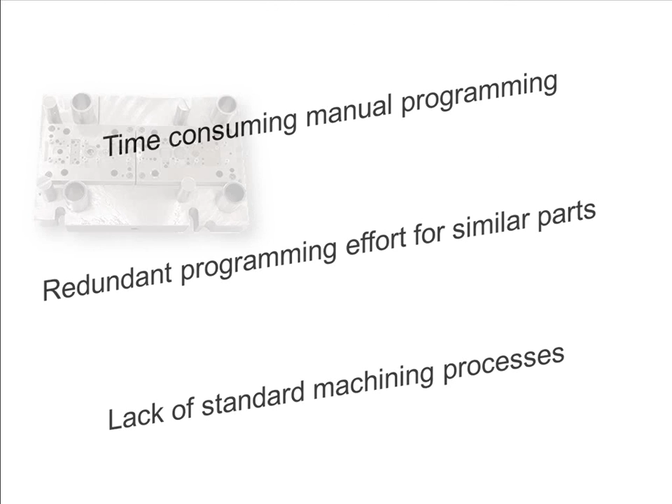Mold and die tooling structures are typical examples where parts can have many similar features, such as holes and slots. Let's take a look at this mold plate that has many slots, pockets, holes, and corner notch features that need to be programmed and machined.

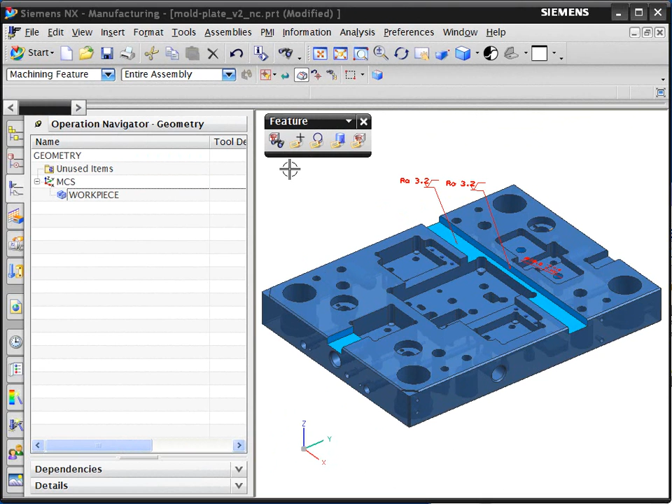The first step in the process is for the system to recognize the machining features. In an automated process, the 3D geometry, which can come from any CAD system, is analyzed and checked for feature types. Here we see the system stepping through the recognition process.

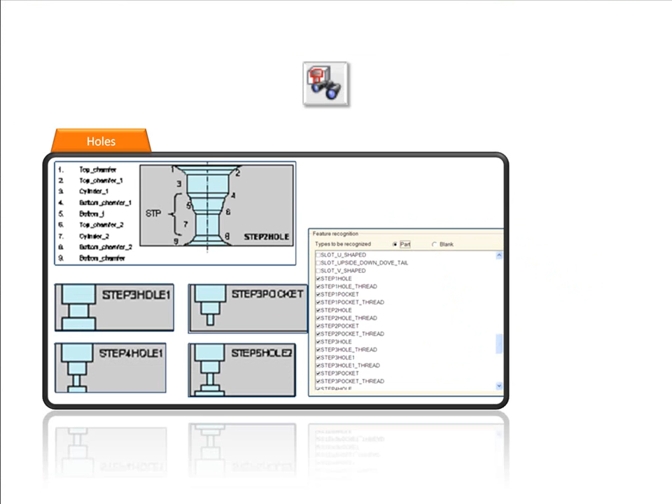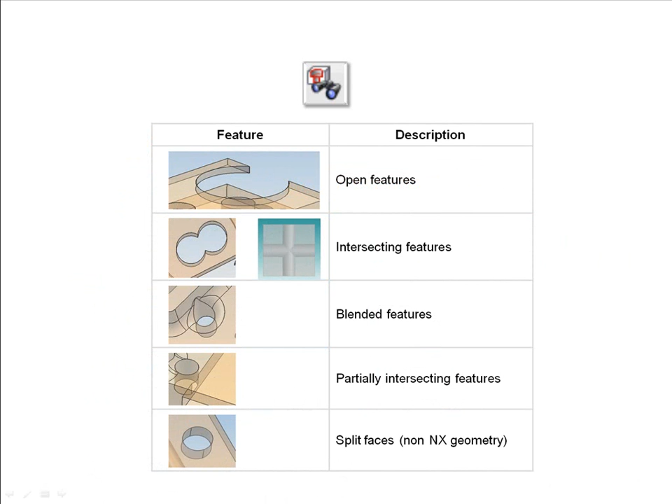The system can address a wide range of feature types. The standard system provides more than 70 feature types classified under groups such as holes, slots, notches, and pockets, with the option to add more features that you can define. The system can also address complex configurations of the standard features, such as intersecting holes or open pockets.

NX-CAM displays the recognized features in the Feature Navigator. You can browse and inspect these from the Navigator or directly on the part. The key attributes of the recognized features, such as location, dimensions, and tolerances, are also displayed in the Navigator.

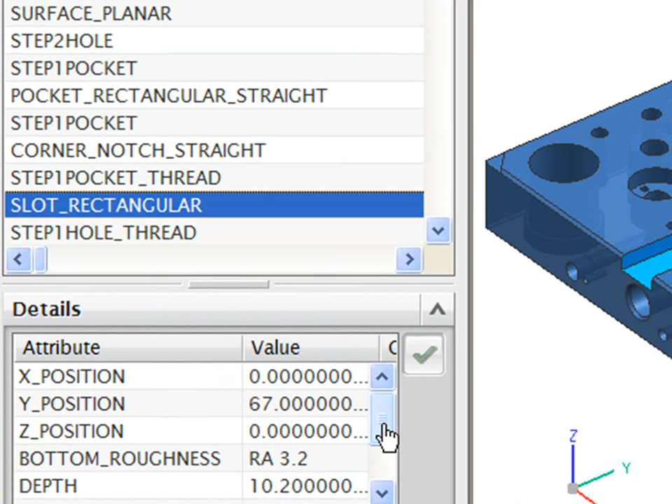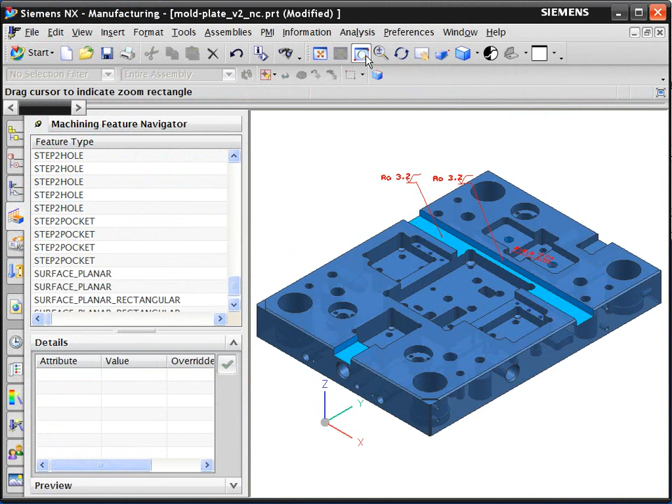The second stage is the building of the machining process for the recognized features, such as these pockets and slots. In this critical step, the generative feature-based machining in NX automatically determines the best or preferred machining process for each feature. When the system builds the machining sequence, it can also use non-geometric data, such as tolerances and surface finish values.

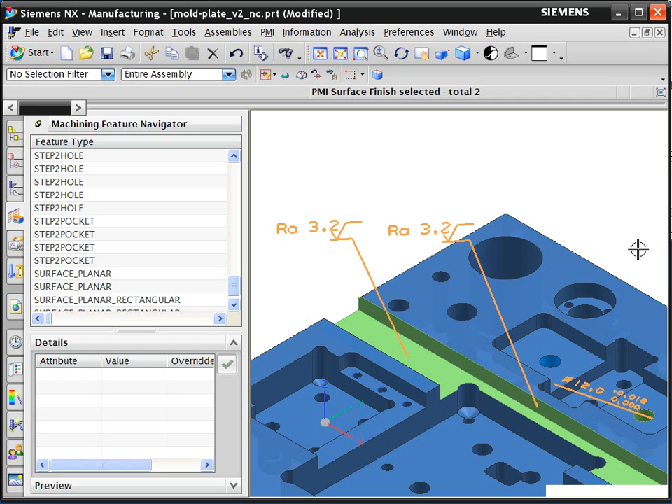These are typically attached to a 3D CAD part model during the design process. This product and manufacturing information, or PMI, is shown as annotation on the part model and can drive the machining method selection. Let's take a look at the system building the machining process for the features it has recognized.

We could generate operations for all the recognized features in one go, but for this example, we will just process the data for these slot and hole features.

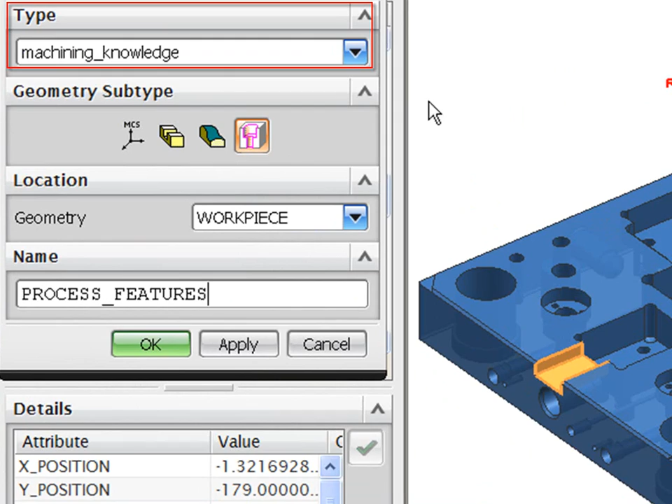The system automatically builds the machining process from information maintained in the Machining Knowledge Library. The system considers requirements of this feature and tries to select the operations that are the best fit. It can be set to meet objectives, such as finding the least expensive processes.

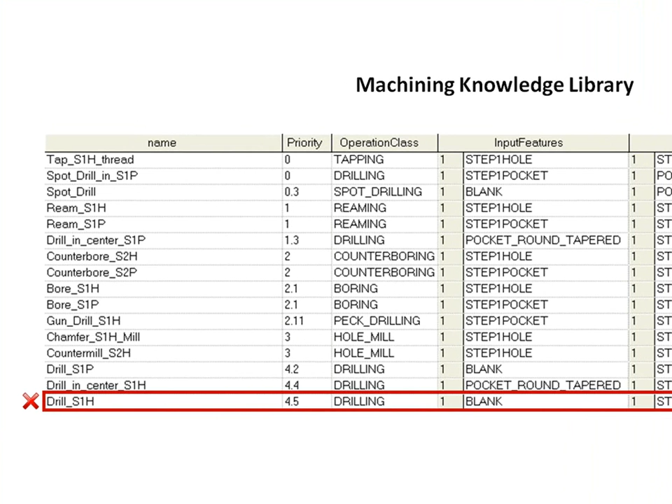In this case, the tolerance requirements for this feature, read from the 3D model, force the system to ignore the basic drilling options and select a boring operation.

The system proceeds to automatically generate the sequence of operations needed to machine this hole feature. It selects subsequent operations from the library until the process is complete. In this case, 3 operations are needed to make up the machining process.

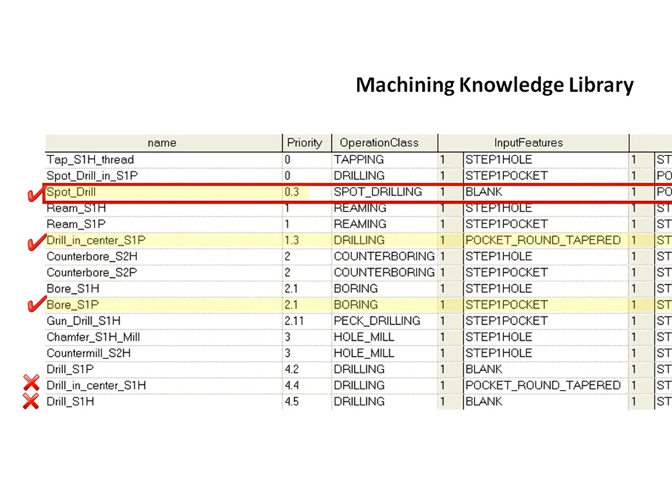This special method of combining individual operations from the machining library makes the system very flexible. It avoids the need to manage thousands of preset machining method templates.

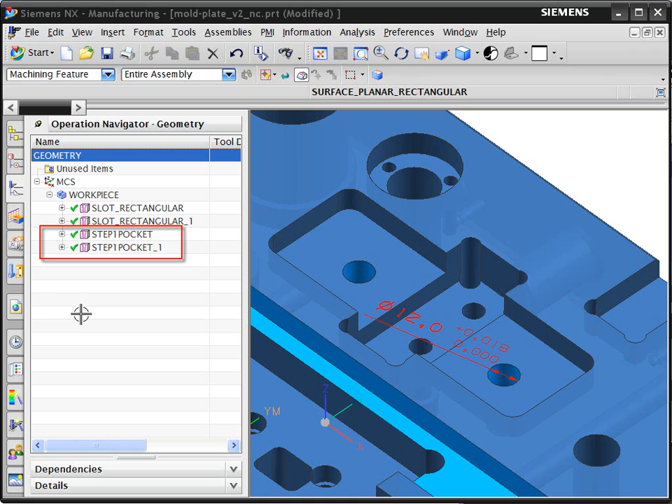Let's take a look at the automatically generated machining operations in the Operation Navigator. These two hole features have the same size and geometry, but one has special tolerance requirements, as shown on the 3D model. The first hole, with no specific tolerance information, has 2 operations in the automatically generated machining process.

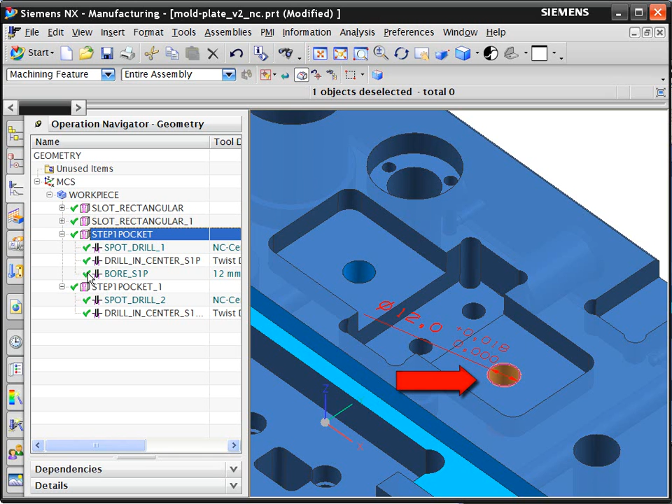The second hole has a tighter tolerance and requires a specific finishing process and tool. Thus, the system added the higher precision bore finish operation to the machining process.

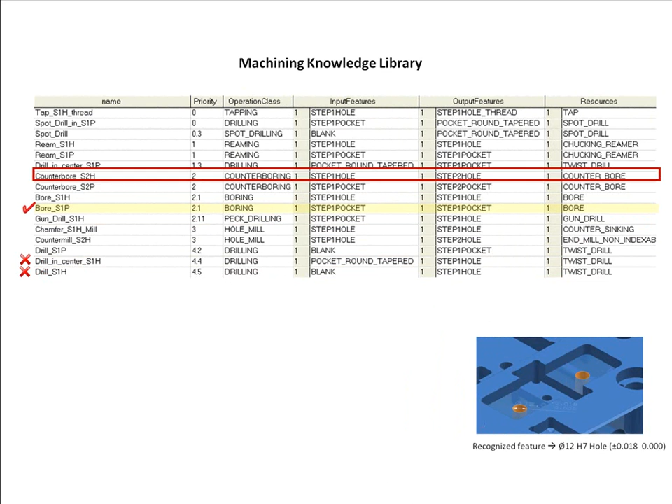As we have seen, the feature-based machining in NX-CAM uses a special approach to generate the machining process for each feature from a library of standard operations.

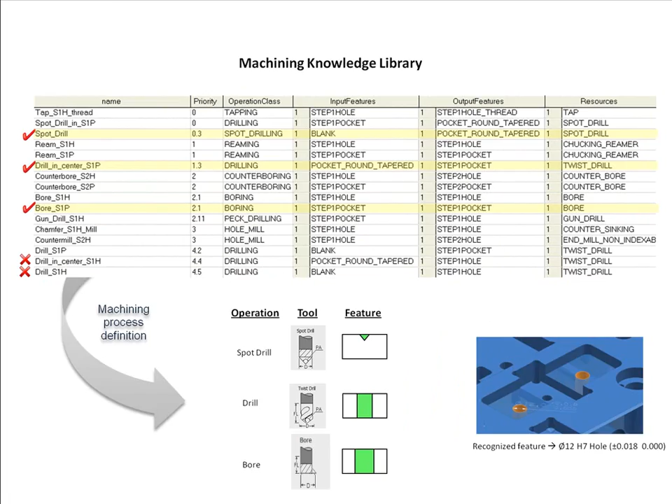This generative approach avoids the need to build and manage a complex set of machining templates, as seen in many systems. In addition, the system allows us to use PMI 3D model data to drive automated NC programming.

NX-CAM customers report a 90% reduction in programming time using feature-based machining.

The feature-based machining capability is included in a number of the standard NX-CAM software packages. It is also available as an add-on module.